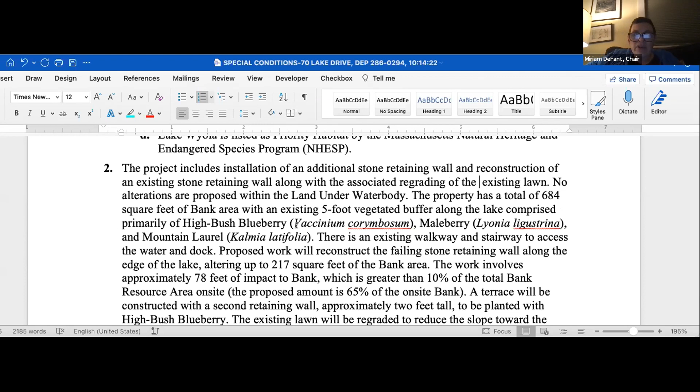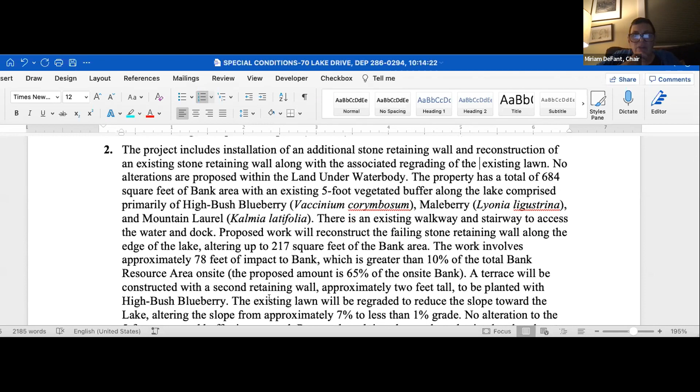No alterations are proposed within land under water body. The property has a total of 684 square feet of bank area. There's an existing walkway and stairway to access the water and dock. Proposed work will reconstruct the failing stone wall along the edge of the lake, altering up to 217 square feet of the bank area. The work involves approximately 78 feet of impact to bank, which is greater than 10% of the total bank resource area on site. The proposed amount is 65% of the on-site bank.

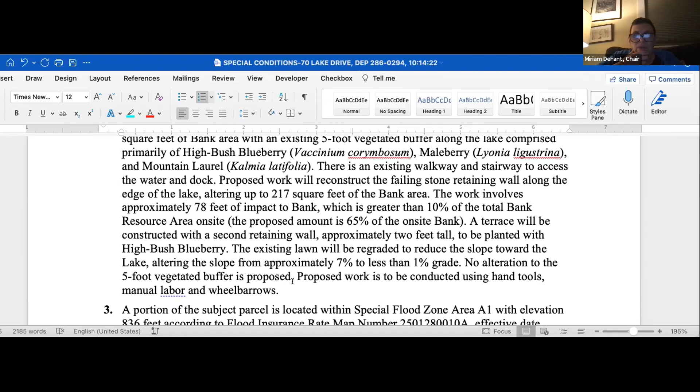A terrace will be constructed with a retaining wall, and the grade will be reduced from 7% to less than 1%. Work to be done with hand tools, manual labor, and wheelbarrows.

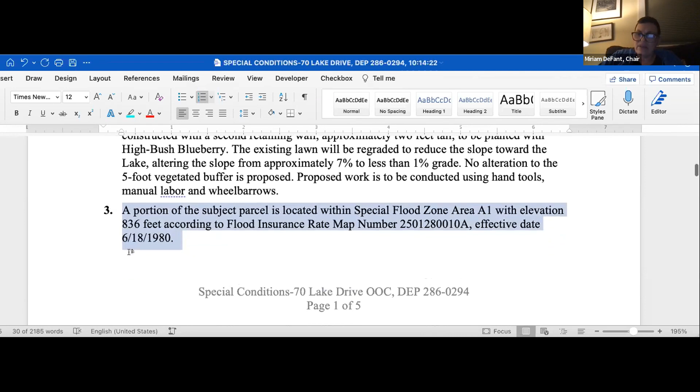I have this in my notes, and I don't know if this is actually correct, that it's in the flood zone. That was not discussed, and I think this is not correct, so I'm going to take that out. Yeah, it is not within the flood zone. That's what I thought. Zero.

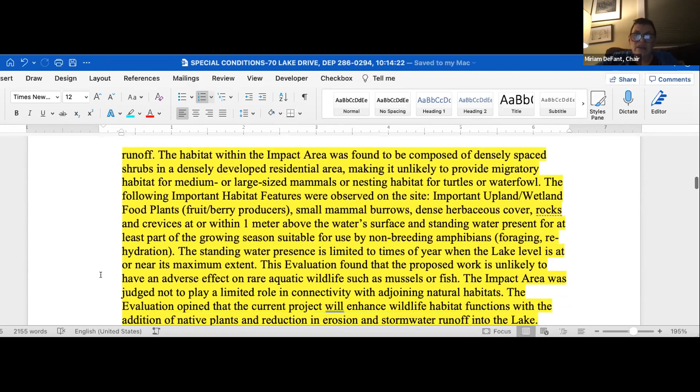Then I have some findings related to the wildlife habitat evaluation, just summarizing that this evaluation found various types of habitat. I don't know if you guys want me to read this? Yeah, I read it, you sent it around, so I already read it. I read it. Good, very good. It's good. Okay, good.

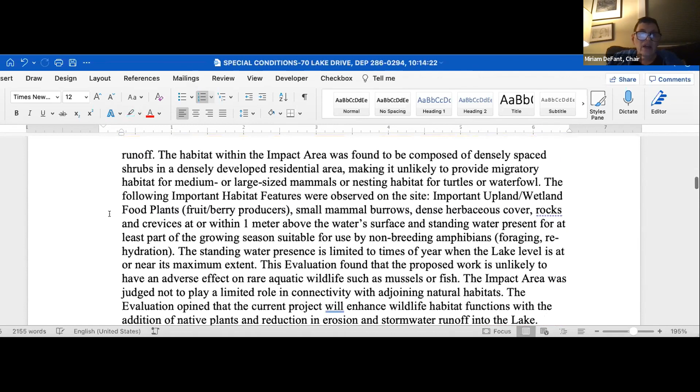I thought it was important to do that. Then it's just the pitter patter that we always have: presumption, they've rebutted the presumption, blah blah blah. And then most of this is just boilerplate, all boilerplate conditions that we always put in our conditions. And these two conditions: that they'll give us a letter of acknowledgement with a wet signature within 30 days of the issuance of this order.

No work shall commence until proof has been provided that the order has been filed and recorded with the Franklin County Registry of Deeds. Work on this project shall take place only when the lake water level has been drawn down. It's the applicant's responsibility to keep informed of the lake levels for the appropriate time period to conduct the work. No removal of trees is approved with this order.

That sound all right? Yep. Miriam, is it absolutely necessary to do this during the drawdown? The reason I'm asking is that was our original intent, but we were kind of behind. Mark, I'm having a hard time hearing you. Does it say better? A little better. Okay, my question is, is it an absolute requirement to do it during the drawdown?

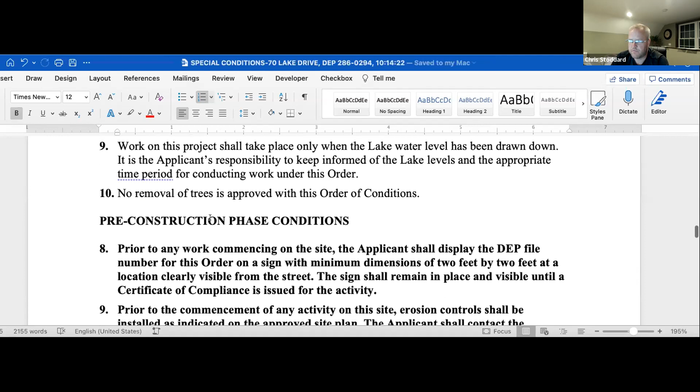Yeah, I think what makes sense is, Mark, get as far as you can, and if you have to amend it for the spring, you just come back in over the winter.

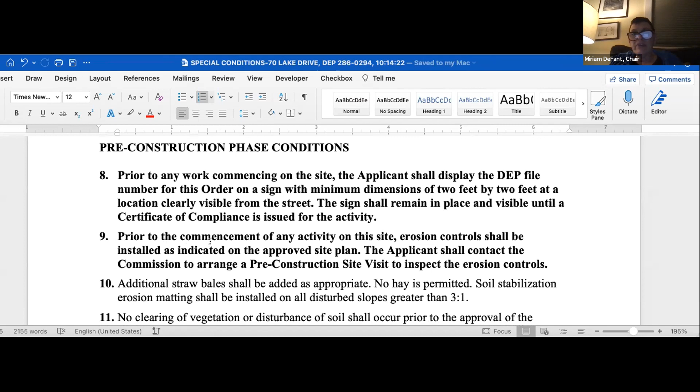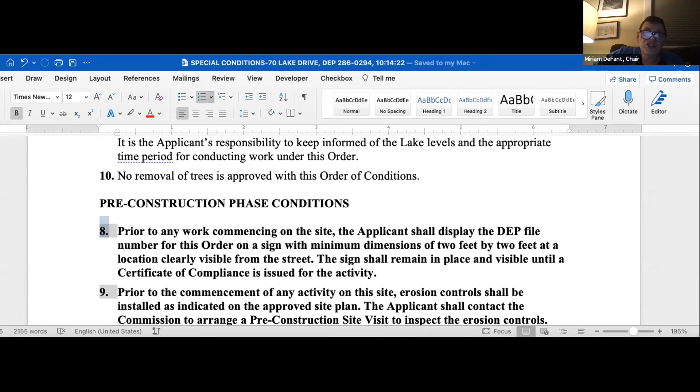Okay, so prior to any work commencing, you have to display the DEP file number. I have a question - why does it start with number 8? Because my numbering is off. Thank you, Robin, I usually go back and double check that. But you know what - there we go. Thank you, Robin. You're welcome, you were just confused.

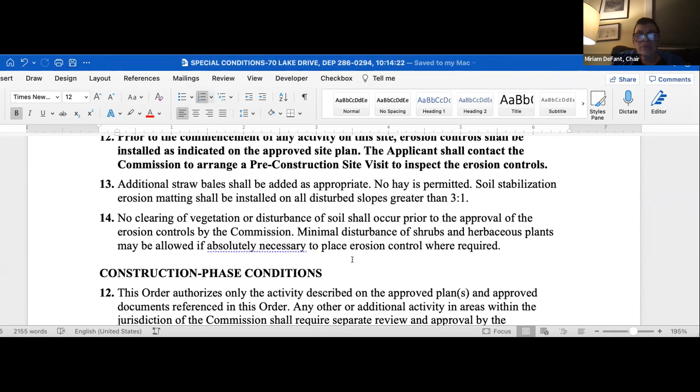All right, and then straw bales, no hay, no clearing of vegetation, minimum, blah blah blah. Again, I'll change this number to 15.

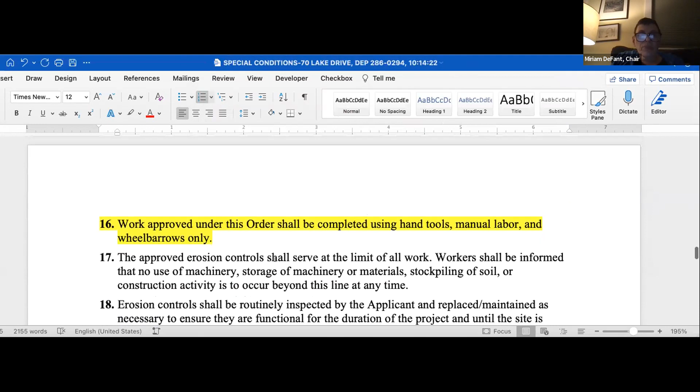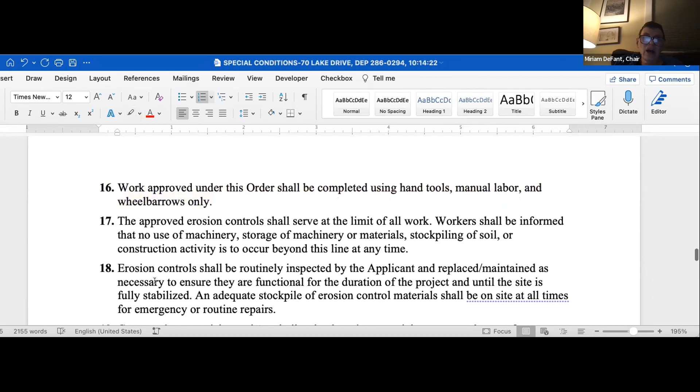Work approved under this order shall be completed using hand tools, manual labor, and wheelbarrows only, because that was part of what was in the narrative. And then erosion controls at the limit of work - this is all just boilerplate, standard language we put in any of our permits. Waste products have to be removed and disposed of off-site at least 100 feet from any resource area and 200 feet from any rivers or streams.

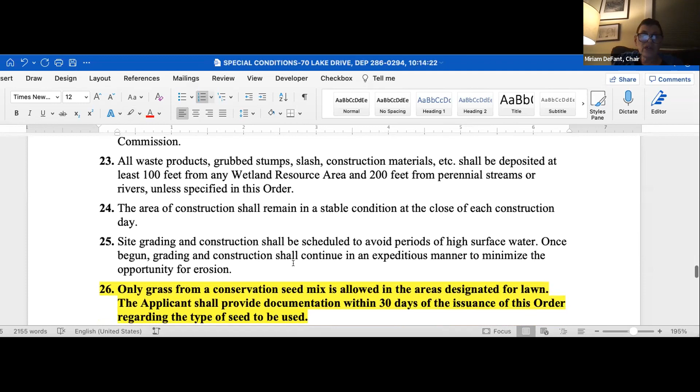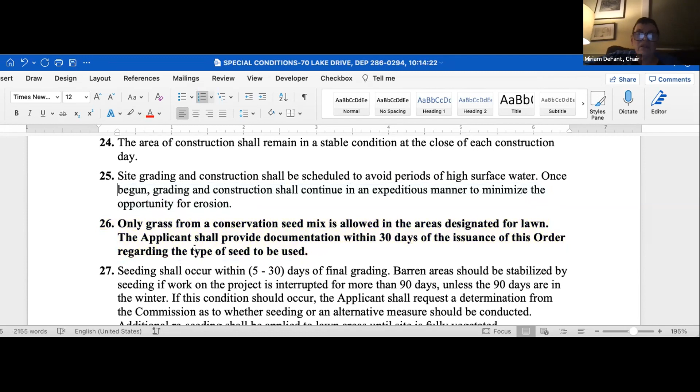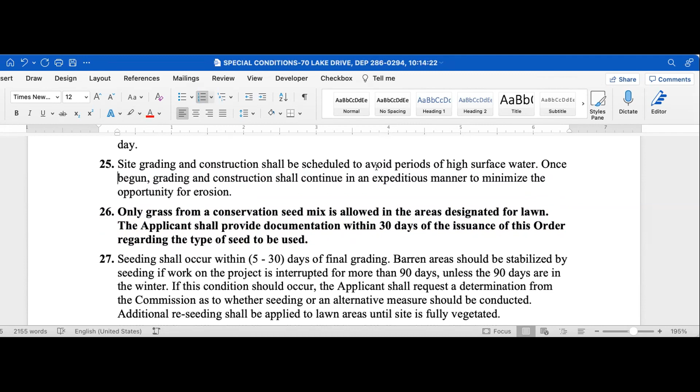Only grass from a conservation seed mix is allowed, and the applicant shall provide documentation of that. So that's another thing - just so you know, Mark, the things in bold are things you have to act on. I've bolded them just to help you. Janice? I was just wondering, because it wasn't clear, how much lawn area has to be in the conservation mix, and does it have to be mowed only a couple times a year, or can it be mowed regularly?

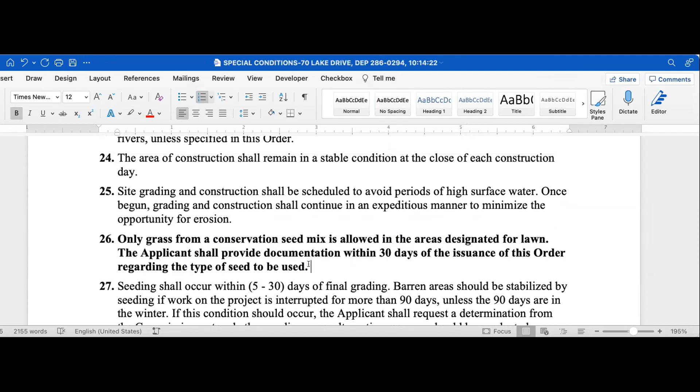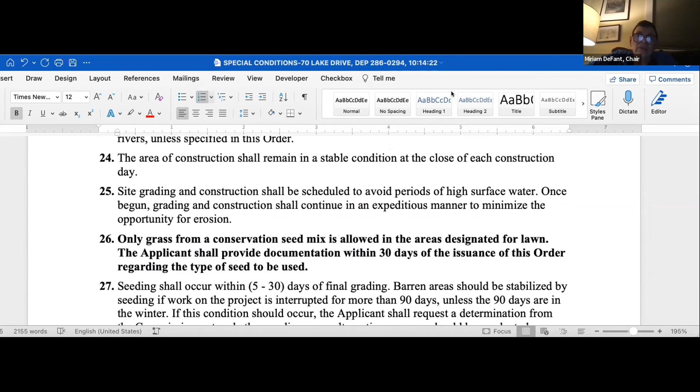I wasn't sure, we haven't put any conditions in about mowing. How much area? Just the area that's been disturbed, basically? That was my thought, yeah, wherever they're going to be seeding as part of the project, in order to get it vegetated. Does that sound right?

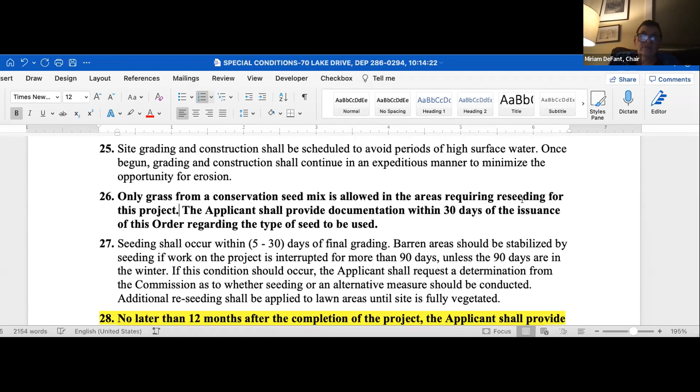Do I need to say that? The areas designated, the areas requiring reseeding for this project. How's that sound? Clear that he doesn't have to tear up his whole lawn.

And then no later than 12 months after the completion of the project, provide photographs to verify the revegetation process. That's something that we've done before, just to make sure everything's stable. There's some people in the waiting room, Carrie, you can admit them. And then a post-construction site visit within 30 days.

And these are two conditions that we've been adding to lakeside property projects, Mark, as continuing perpetual conditions: no use of pesticides, herbicides or fungicides, and only slow release granular type fertilizers. And there's no stream banks, so we don't need to have that.

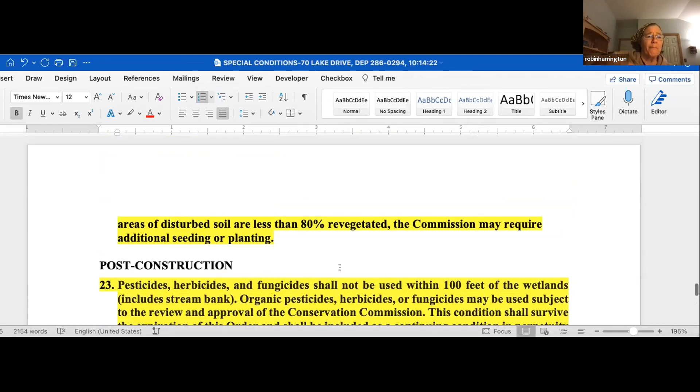All right, any other questions from anybody? So the numbers are correct? They're from, I don't know- no, they're not, but I'll get that highlighted. 15, 16, and then it goes to, this was 28, so this should be 29.

I'll do my best to proofread this also before I do the submitting. Okay, 29, then we're done. That sound all right? Yeah. Okay, I'll stop the screen share.

Do I have the commission's permission to sign digitally for the digital permit? Everybody, one at a time, say aye. Aye. Aye. Okay, all right, everybody said aye.

All right, so does somebody want to make a motion to approve? I make a motion to approve the order of conditions for 70 Lake Drive. I'll second. Okay, David, aye. DeFant, aye. Harrington, aye. Aye. Wilson, aye.

All right, thank you very much. All right, so I think we can move on to the next piece probably pretty quickly.

We went out and did a site visit at 27 January Hills Road to take a look at the driveway that is to be repaired as part of this open enforcement order that was issued back in December of 2021. And there were some delays on the part of the landowner getting a wetland delineation and getting an engineer to do the design work. And so here we are, and Chris Stoddard did the design work.

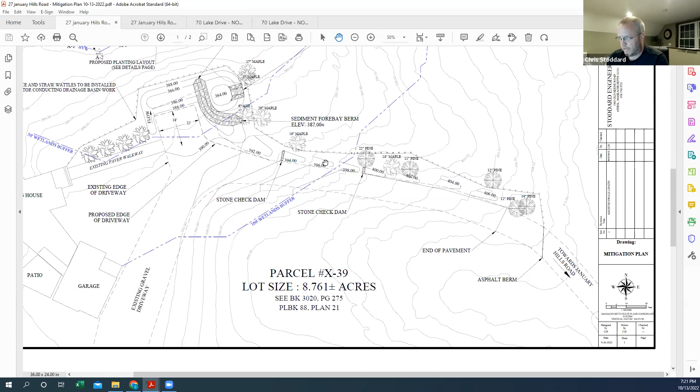So as we get closer here, all the flow from the road and about halfway through the parking lot, all the way down through here, will flow into this new infiltration BMP. It'll flow into the sediment forebay first, so all the sediment will settle out into here. It'll come up over the stone weir and then actually infiltrate on this side. And then as that fills up, if it fills up, it'll come out the level spreader on the end here.

What we've also done is I've reduced the parking area. The parking lot was approximately 27, 28 feet wide. I've narrowed that down to 22 feet, and I've also shrunk the length down to 18 feet, which is still more than enough for multiple cars to park and turn around there. But I needed the room to put the infiltration BMP in, so I've removed all that.

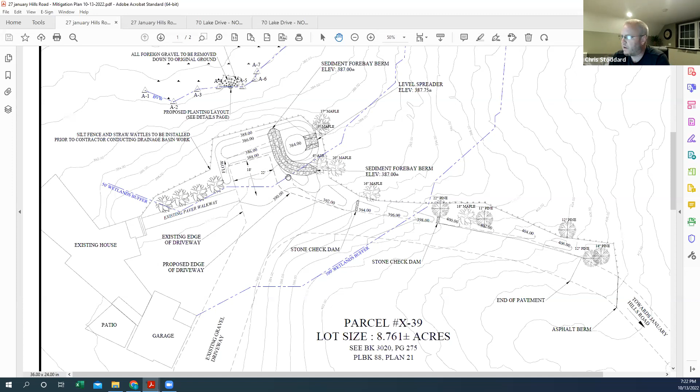So as far as the actual damage in the wetland, as she said, I did locate all of Ward's flagging along the wetland area, and I've also identified all of the soil that migrated off of this slope from the runoff into the wetland. So as part of the project, obviously silt fence and straw wattles around both sections, but specifically around the section that we have to remove the soil. So the proposal is to remove all that existing soil.

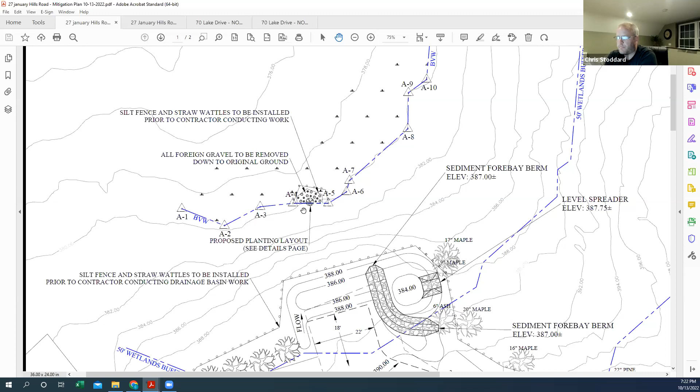And then on the next page, I'll show you, we do have a planting list and some wetland plants to put back in, fairly dense to try to get a good growth in there.

I don't think we even noticed that there had been that kind of sediment that far into the wetlands. So that's, yeah.

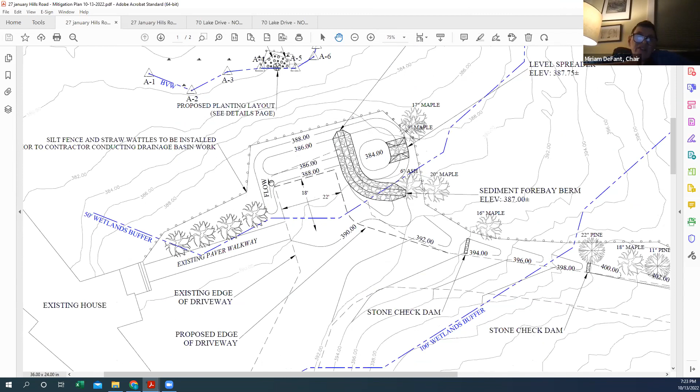I kind of poked around a little bit under the leaves and I could see where the gravel was. So that's why I wanted to really make sure I located it all for you and make sure we get a good removal of that site.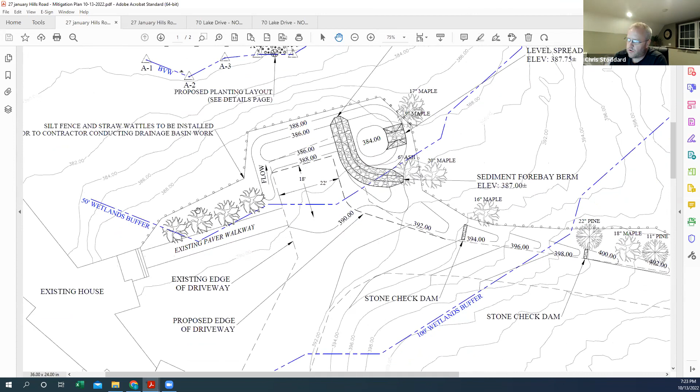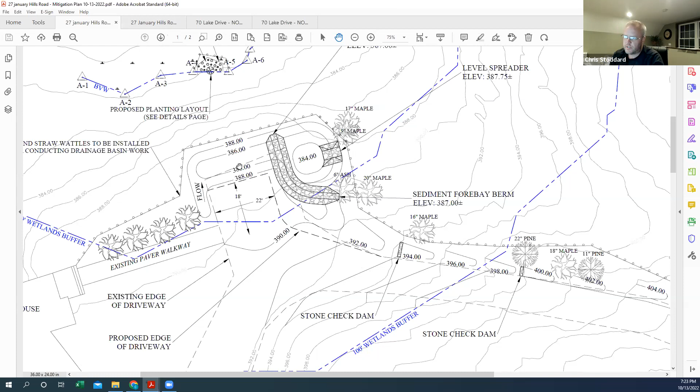So obviously, straw wattles and silt fence around the entire area for the drainage system. We have provided an operation and maintenance plan for the infiltration basin for the property owners. Basically, it says every time it rains more than 2 inches, they go out and look at it. Every 6 months, remove the sediment within the basin if it builds up. There's a whole list of criteria for them to go through.

We can switch to the next page. We can zoom out a little bit. So this is a real blown up version of the wetland area.

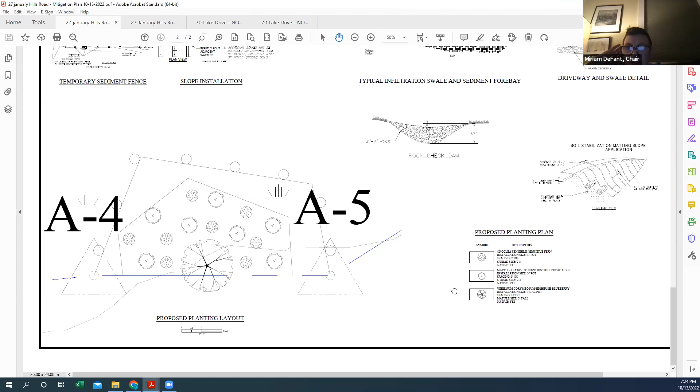So like I said, we've identified a number of plantings over here to be placed in the area after they excavate all the foreign material out. What I did, some ferns -- because I can't read the print. Oh yeah, sorry. Oops, go away. Yeah, so I did some sensitive ferns, some ostrich ferns, and a high bush blueberry bush in here.

I found them on a town website. One other town had an approved list of wetlands plants, so I kind of thought they fit the area. Plus, in the area, I saw a bunch of other ferns and stuff, so I kind of thought those would all fit in that area fairly well.

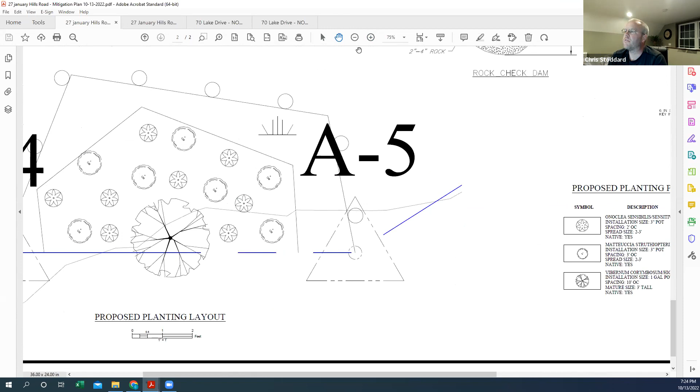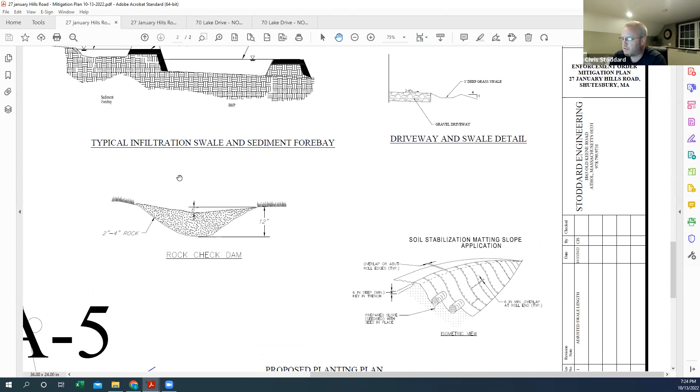We did add some details, so I have details for the stone check dam, the infiltration basin, what the swale will look like on the edge of the road. And then I did add this, which is kind of a standard detail for slope stabilization matting. It's not anticipated to need it, but it's there just in case we get a slope issue or something. And then just the straw wattles and sediment silt fencing detail as well.

I think based on reading the enforcement order, I think this addresses all of the commission's concerns. And I can answer any questions that you folks have.

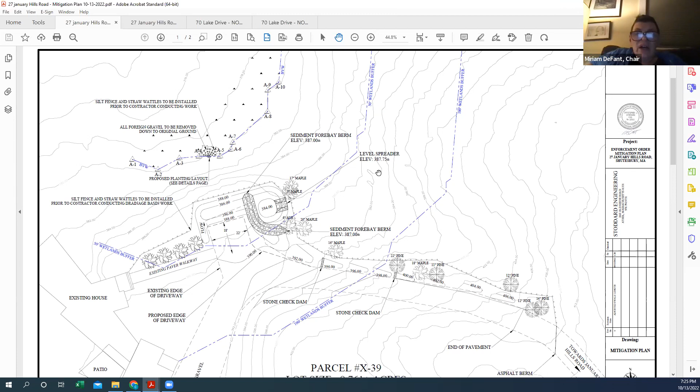So I've got a draft letter for us to approve this, but one of my questions is about the BMP maintenance, because if this was like an NOI, we might put a perpetual condition in. And I'm wondering if in lieu of that, because this is an enforcement order, if we could require of the landowner that she send us a written acknowledgement or an agreement that she understands what the maintenance requirements are and that she'll...

Yeah, I think that's a reasonable request. I mean, because it is a maintenance issue now. Obviously we have something in there that needs to be maintained rather than just let the trees and stuff grow. So I think historically there were stormwater features on this property that maybe the landowner didn't know how to maintain, and so they kind of fell apart over time. So yep, absolutely, I think that's a very reasonable request by the commission. Other people have questions?

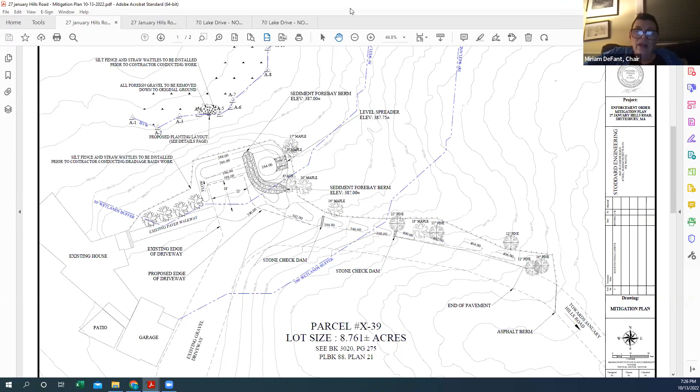Did I send it to people? I can't remember if I did. Send a draft, I may not have. I didn't see it. Okay, I think I was just working on it. Let me see if I can find it. Maybe we can do this quickly before we go to the next item. Okay, Carrie, could you just keep track of people coming in?

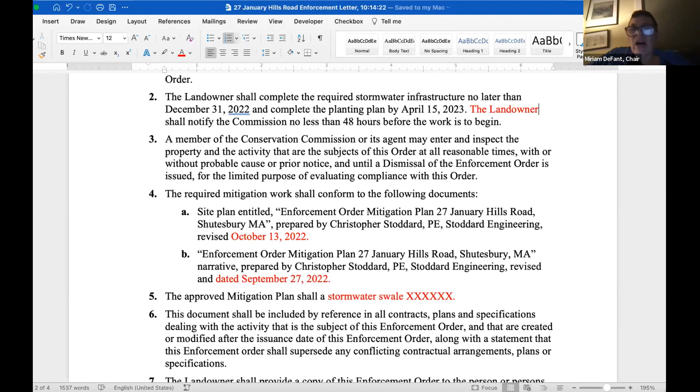Okay, let's move on. I'm gonna need to pull up the agenda. Carrie, could you send me the agenda to my email so I can follow along on my phone, because I don't have it.

The next thing on our agenda is to open the public hearing for the ANRAD for lot O-32, 66 Leverett Road, which is a wetland delineation project being proposed by the town of Shutesbury, involving a wetland delineation conducted by the town's environmental consultants, Fuss and O'Neill.

Who's here to talk about this? Can you see who we have? You've got Mary, and Matt Kissane with Fuss and O'Neill. Oh great, hi Matt.

So what we want to do is open this public hearing and talk about what our lay of the land is going to be. My thought is that if we decide to move forward with getting a third-party consultant, we would delay any discussion about the ANRAD and the wetland delineations until there's been a third-party review.

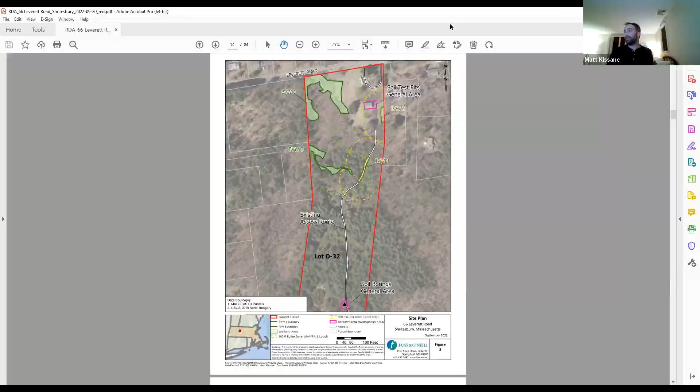Good evening, thanks. I wonder if I can get some clarification between the relationship of this floor drain and this drain pipe, which I believe was removed prior to the takedown of the garage. I don't understand the relationship of the drain pipe, how long it was, what the terminus was, and the purpose of it, and should testing include the terminus site of where the drain pipe ended, or along that path.

Correct. So there was a drain pipe that led out to, I believe, to the east of the exterior of the old 3-bay garage. There's actually a figure from a 2012 environmental investigation done by Cold Spring Consultants, which has an aerial view, and they investigated soils right at the end of that drainage point. So we have an aerial figure and we know exactly where that drainage point ended based off the Cold Spring Consultants environmental investigation from 2012.

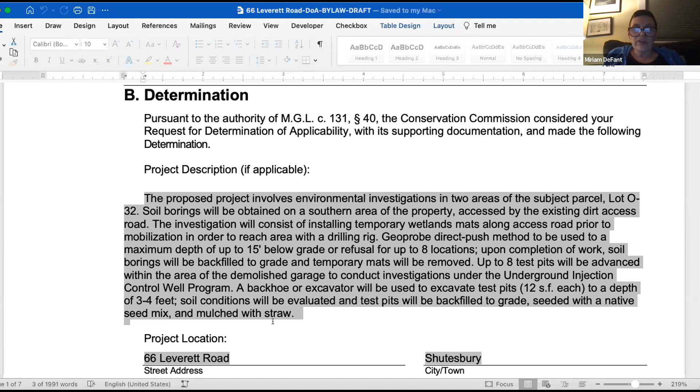Up to 8 test pits will be advanced within the area of the demolished garage to conduct investigations under the underground injection control well program. A backhoe or excavator will be used to excavate test pits to a depth of 3 to 4 feet. Soil conditions will be evaluated, and test pits will be backfilled to grade, seeded with a native seed mix, and mulched with straw.

Now for the determinations, this is what I've got as a draft. Under determinations, we're not going to be issuing a positive determination. I'm treating this like other RDAs where we were issuing it under both the bylaw and the act, so number 5 is checked off.

Janice, are you still there with us? Yep, I'm trying to go through it at the same time. I don't want to lose you. So this is, you're doing one form for both, is that what you're doing? One form for both. Okay, okay.

And then the following area, if any, is subject to a municipal—I think I'm taking this out, actually. I'm taking that off. And then under negative determination, this is not looking like the draft I had that I was working on. Oops, you know what, this is not the draft I was working on. Excuse me, let me find it again. Darn, had it all worked out. Give me one sec, there's too many changes there.

All right, so going back to the positive determination, I'm wondering whether under 2B we should say that we're not approving the wetland delineation. Should I name the individual wetlands? This determination does not approve the boundaries of the...

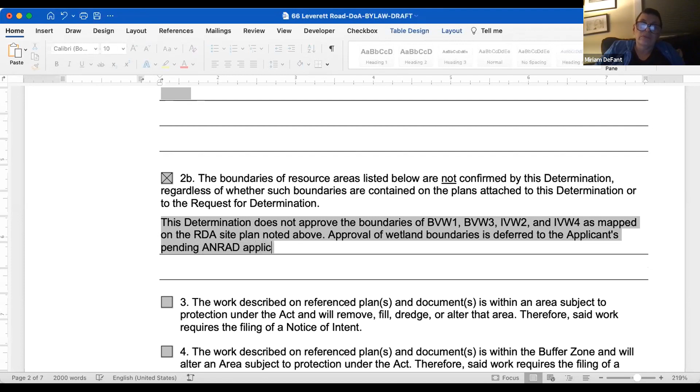Okay, so I'll say it again: Approval of wetland boundaries is deferred to the applicant's pending ANRAD application. How's that? Janice, is that okay?

All right, the work is subject to the bylaw, the work is subject to the act, so we're going down to negative number 3. Say 'see attached special conditions.' This determination is issued under the jurisdiction of the WPA and the Shutesbury Wetlands Protection Bylaw, Shutesbury general.

Okay, that would be it. This is the wrong date, tomorrow is the 14th. Then I'll go get everybody's signature. One, two, three, four, five. Okay, saving that, stopping the screen share.

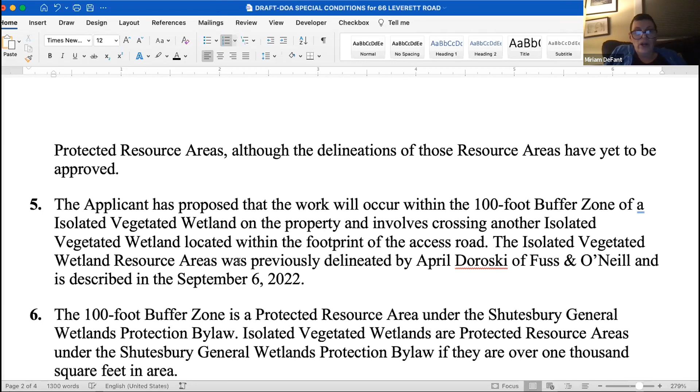Okay, the applicant has proposed that the work will occur within the 100-foot buffer zone of an isolated wetland on the property, and involves crossing another isolated vegetated wetland located within the footprint of the access road. The isolated vegetated wetland resource area was previously delineated by April Doroski of Fuss and O'Neill, and is described in the September 6th wetland delineation. So would that be described?

Okay. So I'm saying they're proposing it, I'm not saying that we agree. Is that clear?

The 100-foot buffer zone is a protected resource area under the bylaw. Isolated wetlands are protected resource areas under the bylaw if they are over 1,000 square feet in area. The Conservation Commission finds that the proposed project will have no negative impact on the protectable resource areas listed above.

With the following conditions, this is mostly boilerplate, but there's a couple of decision points. Wait, Miriam, do we want to say up above that the work is also within the buffer zone to the bordering vegetated wetland that's regulated under the Wetlands Protection Act? Well, I don't say that, I just mentioned this as a statement of fact. Okay, saying which buffer zone.

I could say any... how's this? Any 100-foot buffer zone to, do you know what I'm saying? Yeah, but I think Beth is saying that there is some legitimate DEP 100-foot buffer zone. Yes, there is.

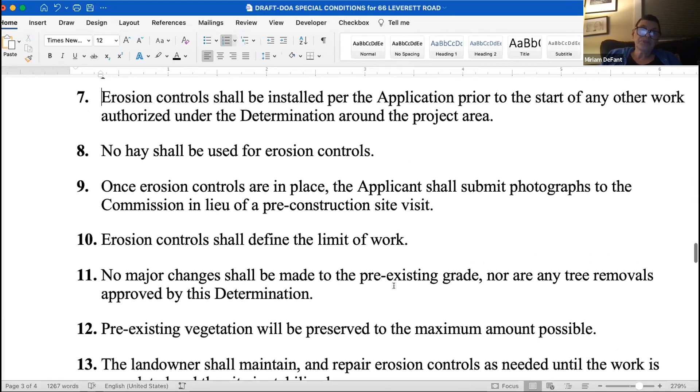Erosion control should be installed per the application prior to the start of any other work authorized under this determination around the project area. No hay shall be used for erosion controls. Once erosion controls are in place, they shall submit photographs to us in lieu of a pre-construction site visit. Erosion controls should define the limit of work. No major changes will be made to the pre-existing grade, nor are any tree removals approved. Pre-existing vegetation will be preserved to the maximum amount possible.

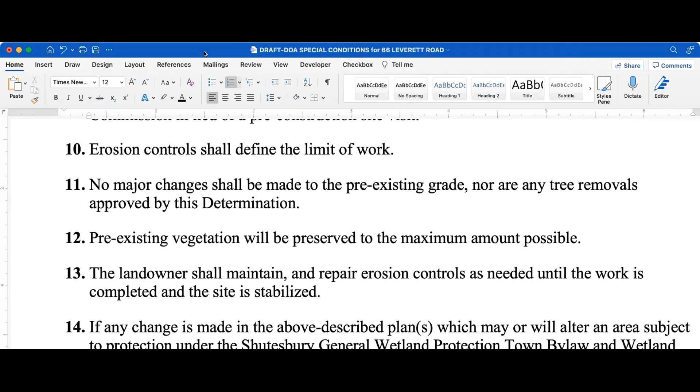Now, we had a discussion about whether there was any way to save the mountain laurels that are on the access road from the rig. They'll grow back. Okay, if any change—this is redundant, okay, you have to excuse me everybody, I did this in a hurry. If any change, so this one can be removed.

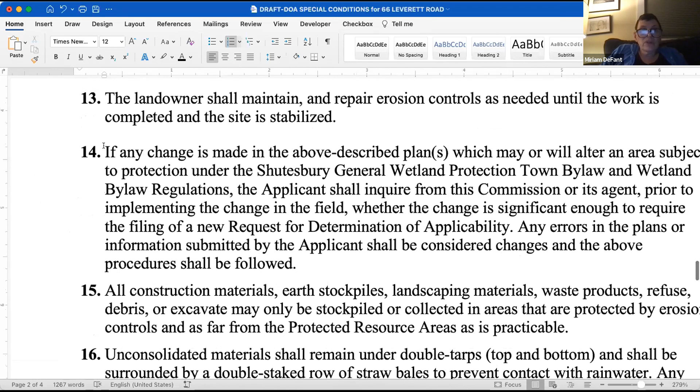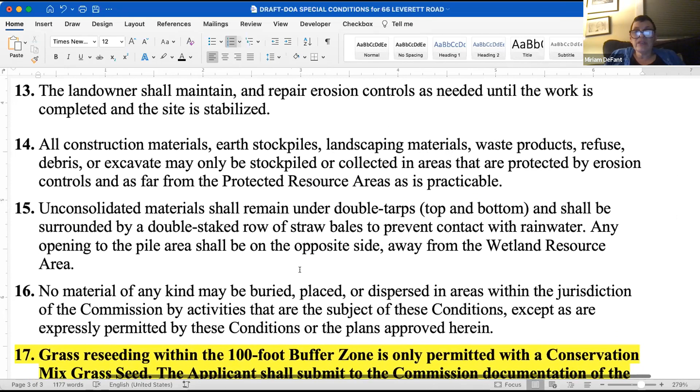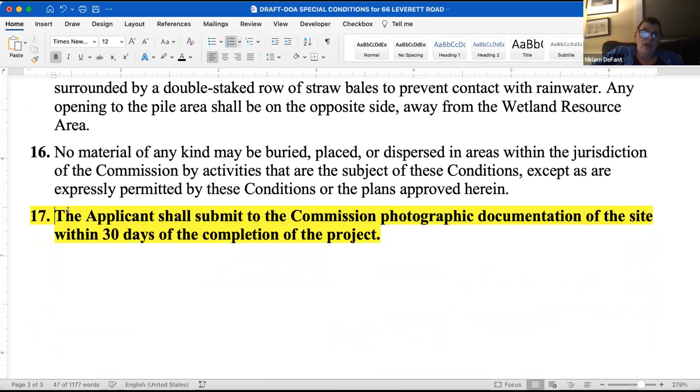Construction materials will be stockpiled in areas that are protected by erosion controls and as far from the protected resource areas as is practical. Any unconsolidated materials will remain under double tarps. No material of any kind can be buried, placed, or dispersed in any areas under the jurisdiction of the commission. And then they've already said they're going to use native grass seed, so I don't know if we have to say that again. Take this out. Yeah, and they'll submit photographic documentation of the site within 30 days of the completion of the project.

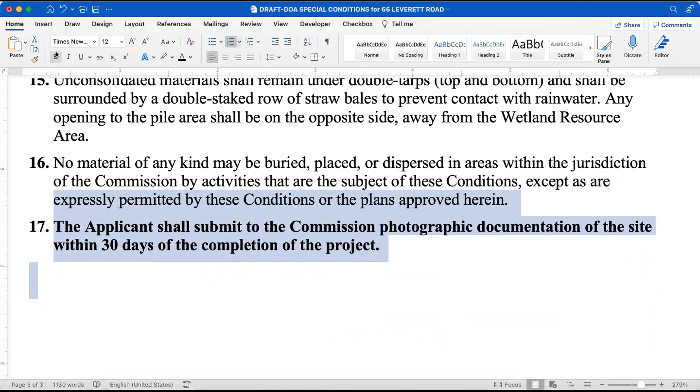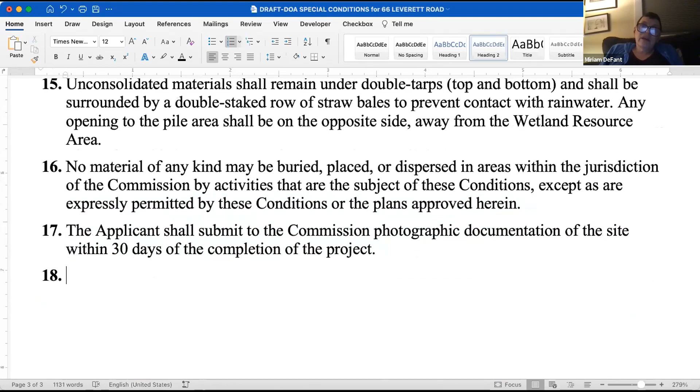Did you want something about the commission receiving any results that are appropriate, sort of public-level results or something like that? Yes, I like that. I was going to say that too. Yeah, I like that, we had talked informally about that. So how would you like to word this? Upon the completion of the environmental investigations on this property, the applicants shall share the resulting reports with the commission within 30 days of their completion, or of their receipt by the town. How's that?

Good, okay, anything else we need to have in here? I think that covers it. Okay, all right.

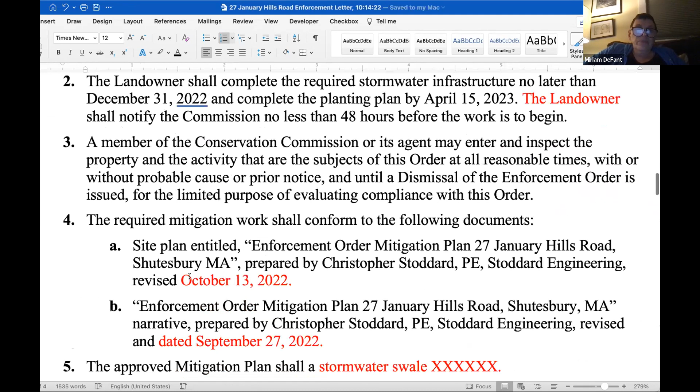So we said December 31st and April 15th. The required mitigation work will be based on these plans.

The approved mitigation—I guess he already gave us this plan, so we don't need to say that it's going to include that swale. I have to say I was very impressed with his design.

I thought it was a really well-designed stormwater system. Yeah, I'm always impressed by the work he does. It was good, the planting plans, I mean it's just really great. I asked him if he only works in Shutesbury, and he said that a lot of commissions ask him that question.

He's a busy guy. So this document shall be included in reference. The landowner should provide a copy of this enforcement order to the persons doing the work. Anyone performing the work is individually responsible. If any change is made, they'll inquire from us to see whether it's significant enough to require a filing of a notice of intent.

We'll receive a letter in writing, with an original signature from the landowner, no later than 30 days from the issuance of this letter and before the commencement of any work, stating that they have read this order and understand the conditions. Erosion controls shall serve as the limit of work.

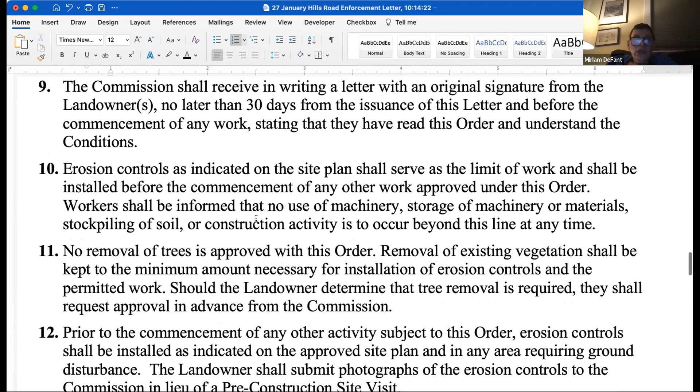No removal of trees is approved. Removal of existing vegetation will be kept to a minimum. Prior to the commencement of any activity, erosion controls should be installed.

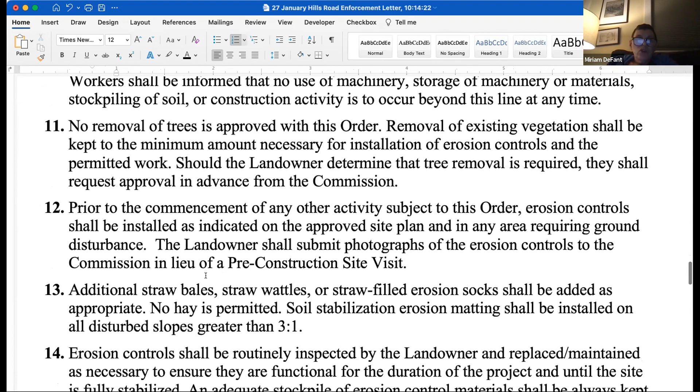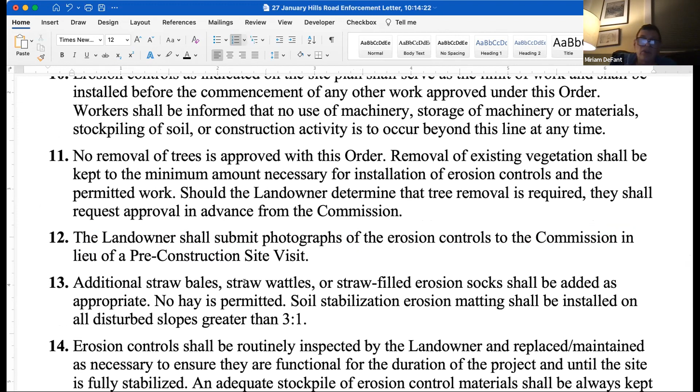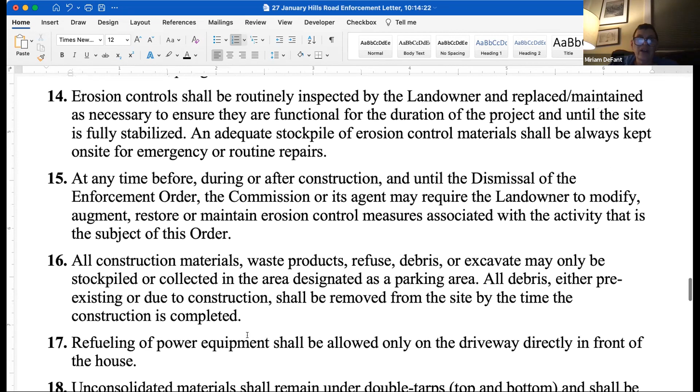The landowner shall submit photographs of the erosion controls to the commission in lieu of a pre-construction site visit, and she has to maintain them at any time until dismissal of the enforcement order. We may require her to modify the erosion controls.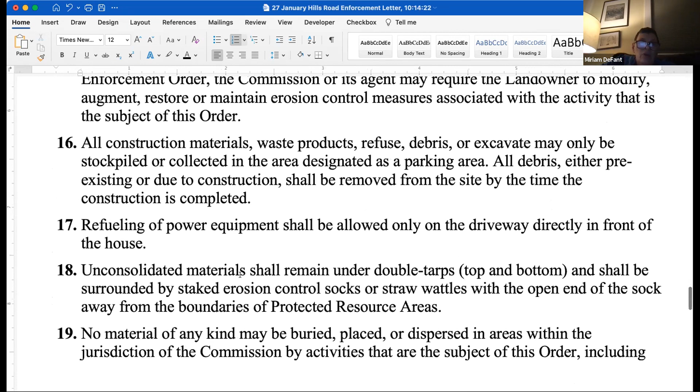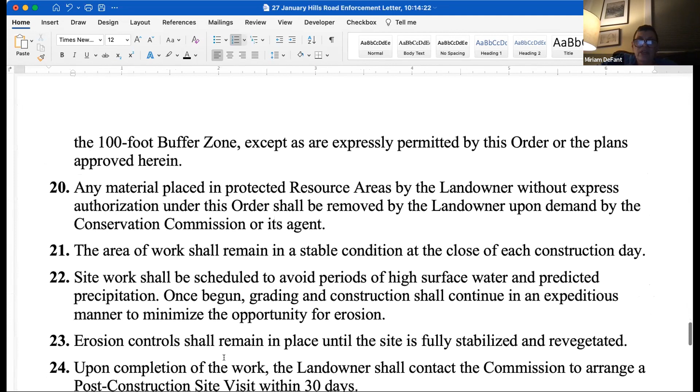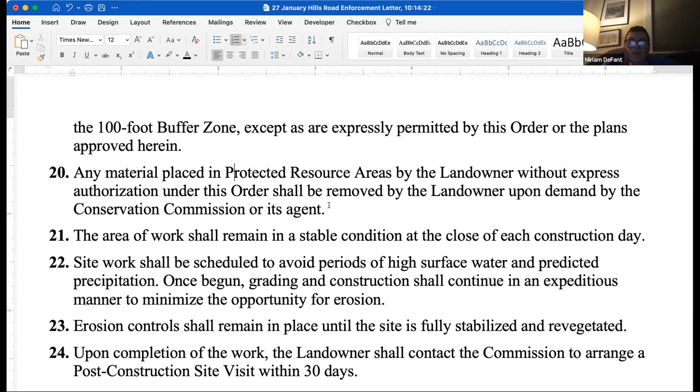Construction materials be parked in the area designated as a parking area. Refueling only allowed in the driveway. Unconsolidated material be tarped; nothing can be buried. All material protected in protected resource areas. Any material placed in protected resource areas by the landowner without express authorization shall be removed.

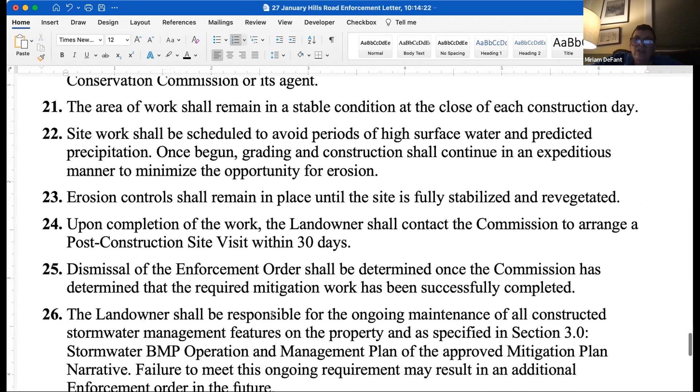Okay, that's just standard boilerplate—keep it stable, avoid during high water, stay until the site is stabilized. A post-construction site visit within 30 days after it's finished. Dismissal of the enforcement order shall be determined once we've determined that the work has been completed successfully.

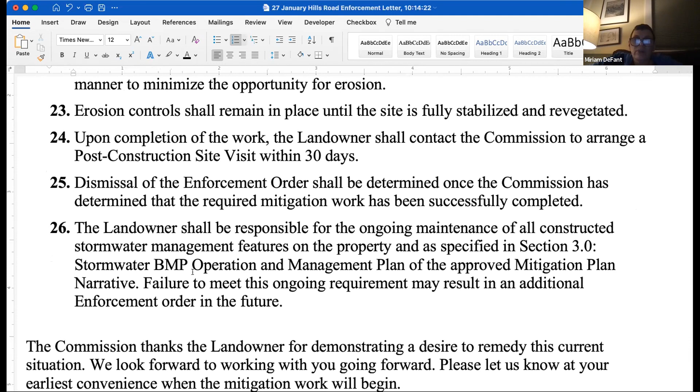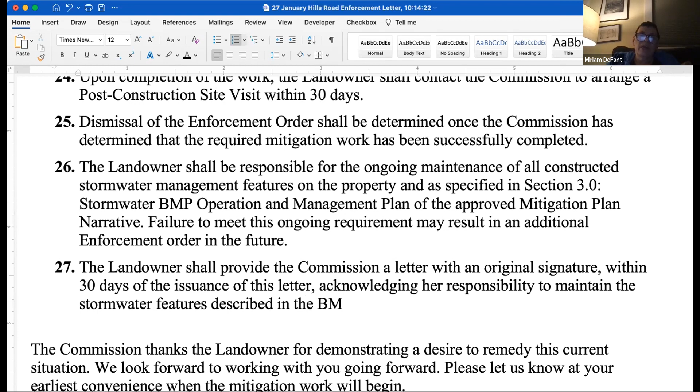And then she's responsible for the ongoing maintenance. And then we should say the landowner shall provide the commission a letter with an original signature within 30 days of the issuance of this letter, acknowledging her responsibility to maintain the stormwater features described in the BMP operation and management.

That sound right? Yep. Anything we want more? We done with this? Looks good. Okay, so somebody want to make a motion to approve this letter?

Make a motion to approve the letter as reviewed for January Hills, 27 January Hills Road, EO. Thank you. Second. David, aye. DeFant, aye. Harrington, aye. Han, aye. Wilson, aye. All right, next that we need to take care of.

The Dudley Pond—I'm just looking here to make sure. We have to approve the Sumner Mountain conservation restriction report. I sent everybody the original, the new report, as well as last year's for a baseline comparison. Has everybody had a chance to read it?

Most of it. Yes. Anybody want to make a motion to approve it? I make a motion to approve the Sumner Mountain CR review report for 2022. Thank you. Second. David, aye. DeFant, aye. Harrington, aye. Han, aye. Wilson, aye. Great, site visits, follow-ups.